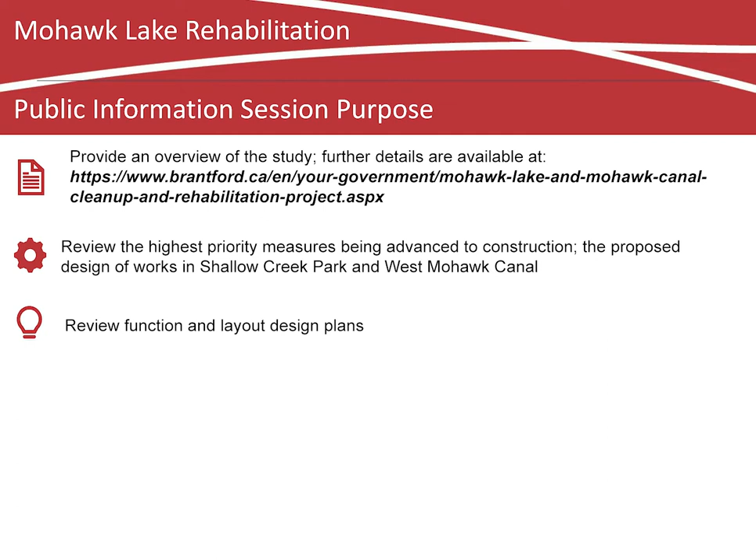This presentation will provide an overview of the study, review the highest priority measures being advanced to construction, and the proposed design of works in Shallow Creek Park and West Mohawk Canal. It will review design, landscaping, and restoration plans, outline the next steps in the design and construction process, and identify how we can hear from you.

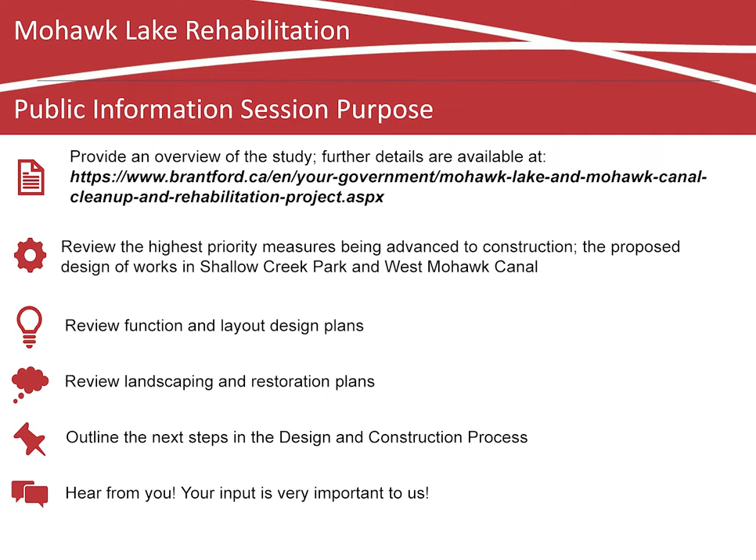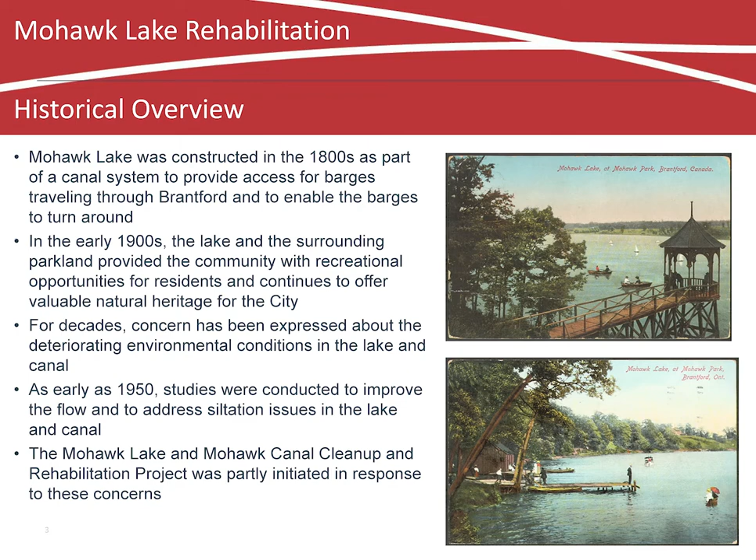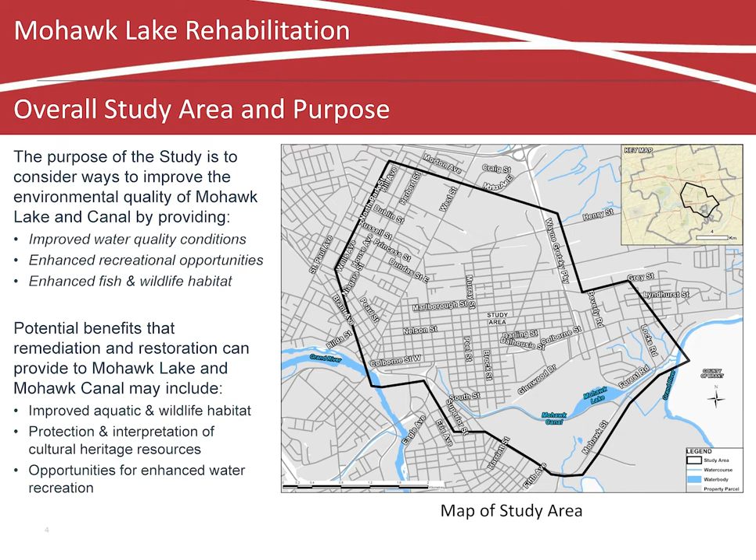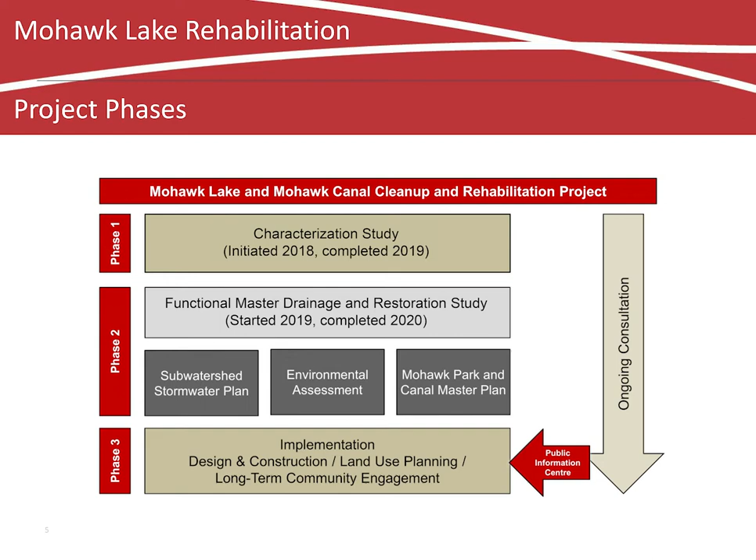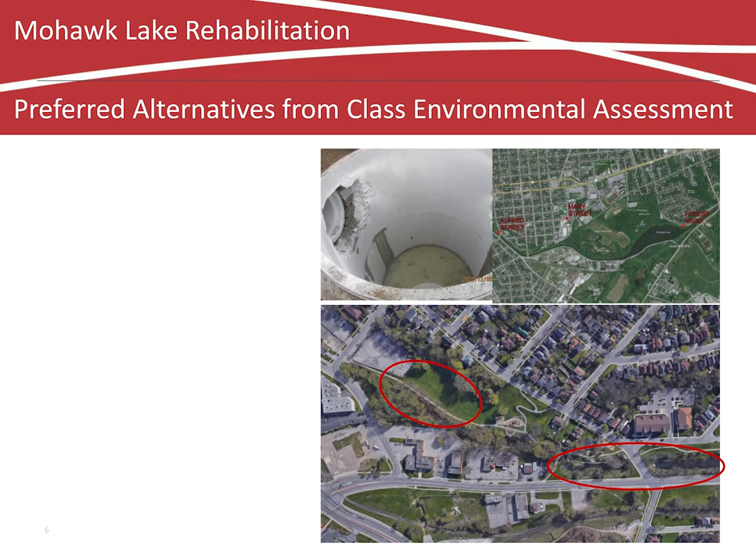The city considered different alternatives to address identified challenges and evaluated these to reach preferred alternatives. One of the preferred alternatives is oil grit separator retrofits. The upper left image is of an oil grit separator, which resembles a circular concrete cylinder with connections for pipes and a deep sump pit to trap sediment. In December 2020, three oil grit separator retrofits were constructed to treat storm sewer contaminants upstream of the lake.

The upper right image is an aerial map showing where these oil grit separator retrofits were constructed, namely Alfred Street, Mary Street, and Forest Road. The image at the bottom, another aerial map, highlights two areas, circled in red, of the retrofits in Shallow Creek Park and West Mohawk Canal. These are additions to pre-existing infrastructure and are currently being designed.

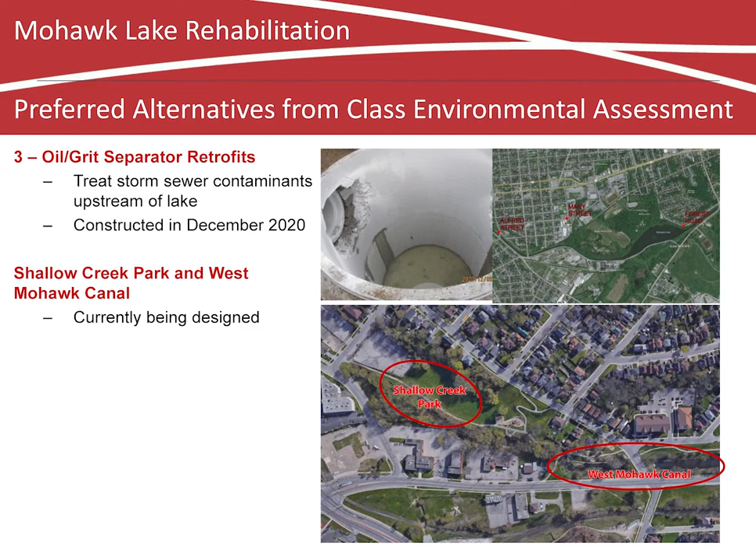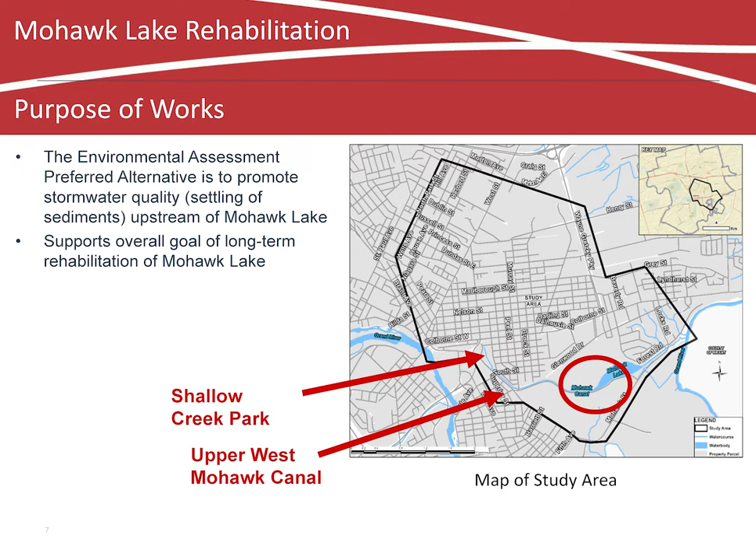Previous work to identify actions supporting the overall goal of long-term rehabilitation of Mohawk Lake resulted in a preferred alternative to promote stormwater quality by settling of sediments upstream of Mohawk Lake. The map shows Mohawk Lake circled in red, with arrows pointing to Shallow Creek Park and Upper West Mohawk Canal.

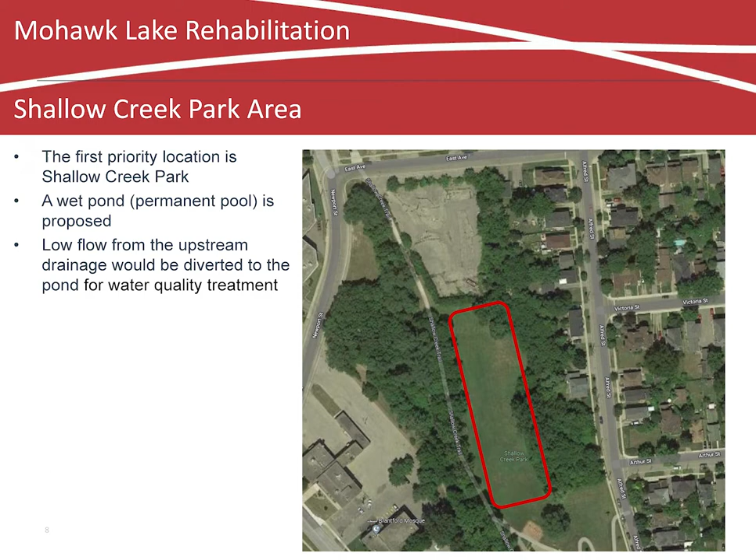Shallow Creek Park is the first priority area. The aerial view of the map shows Shallow Creek Park circled in red. For this area, it is proposed that a wet pond with a permanent pool be constructed. Low flow from the upstream drainage would be diverted to the pond for water quality treatment. Holding water in the pond will allow sediments to settle out of the water prior to flowing into Mohawk Lake.

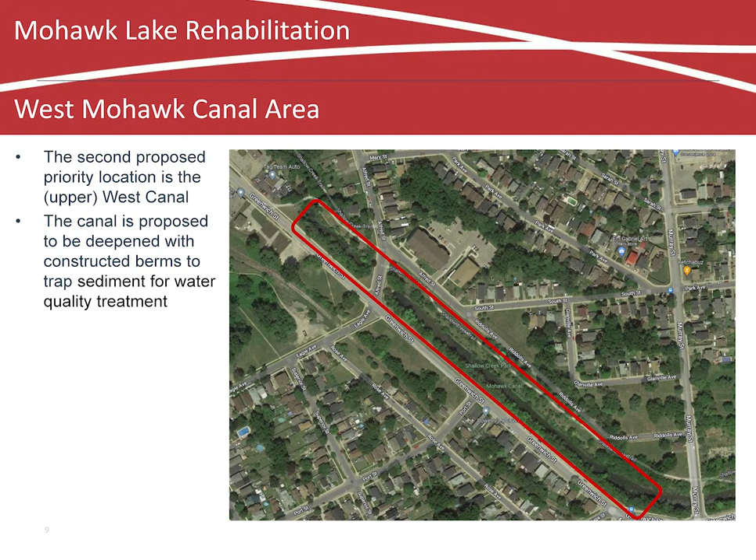West Mohawk Canal is the second priority area. The aerial map shows West Mohawk Canal circled in red. For this area, it is proposed that the canal be deepened with constructed berms to trap sediment for water quality treatment.

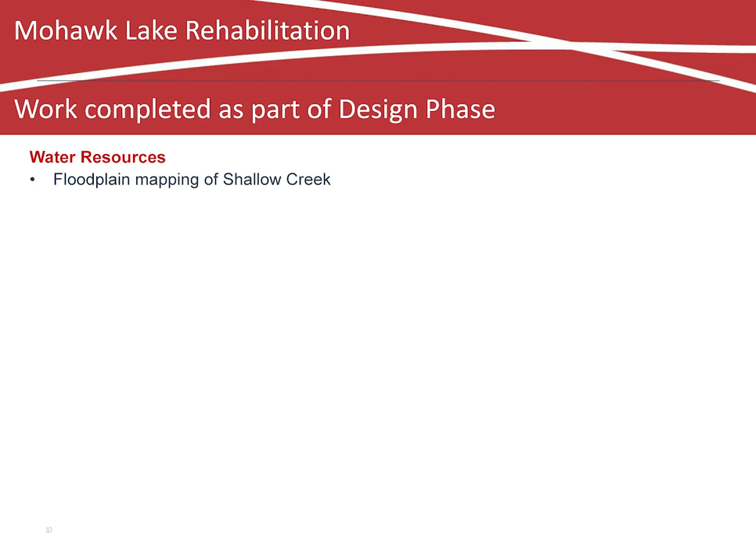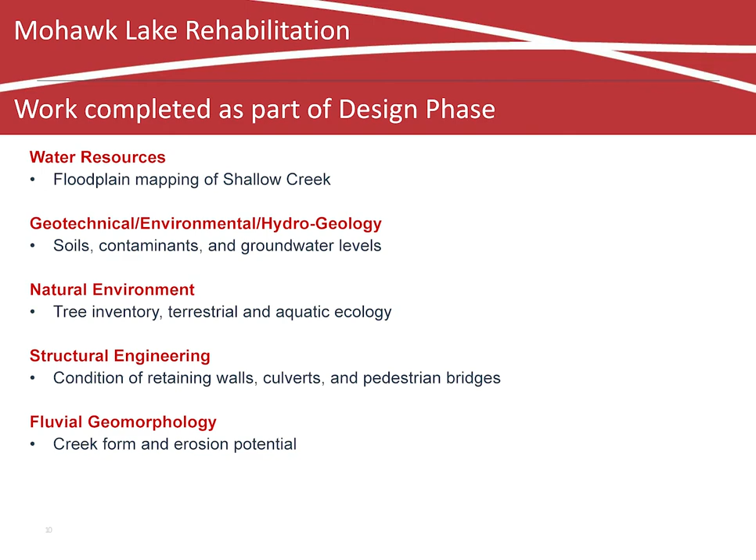To support the work, the city conducted five types of supporting studies as part of the design phase. These studies are the Water Resources Study, which mapped the floodplain of Shallow Creek; the Geotechnical Environmental Hydrogeology Study, which evaluated the soils, contaminants, and groundwater levels; the Natural Environment Study, which included a tree inventory as well as a terrestrial and aquatic ecology assessment; the Structural Engineering Study, which explored the conditions of retaining walls, culverts, and pedestrian bridges; and finally the Fluvial Geomorphology Study, which examined the creek's form and erosion potential.

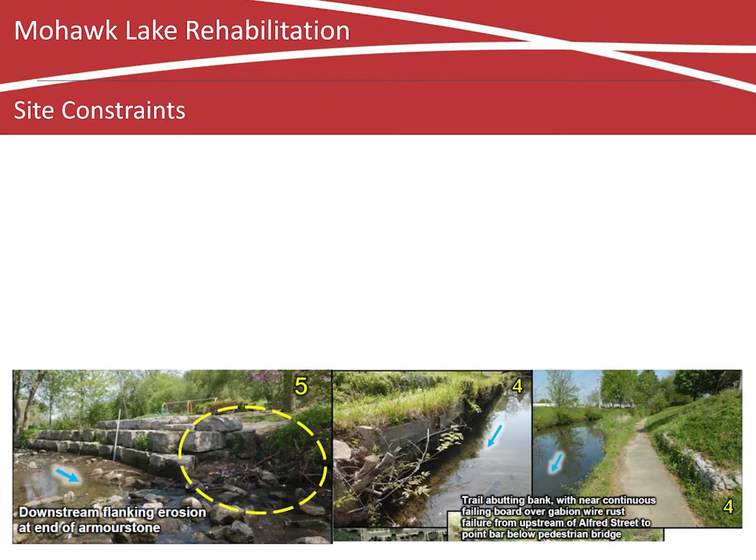There are several site constraints that have to be considered in developing a design. These include legacy soil contamination issues in Shallow Creek Park, the need for an impermeable liner to isolate works from affected soils and avoid groundwater impacts, and the need for erosion control along the creek channel. The photo on the left shows the need for armourstone abutments along the stream bank, and replacement of gabion baskets and wooden boards along West Mohawk Canal and the adjacent towpath trail. The photos on the right show the towpath trail, a historical path for the horses that towed the boats and barges in the canal.

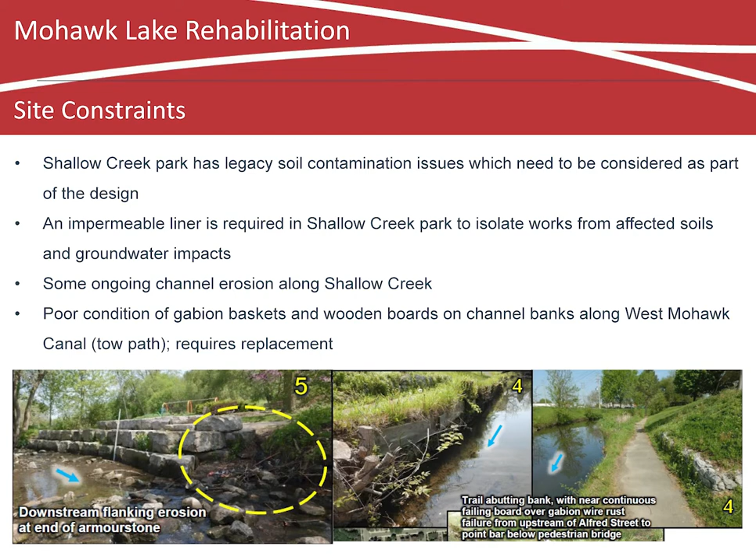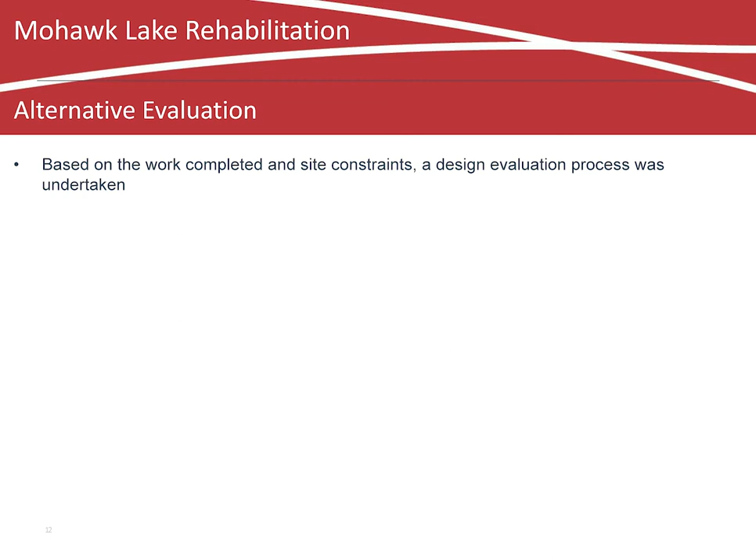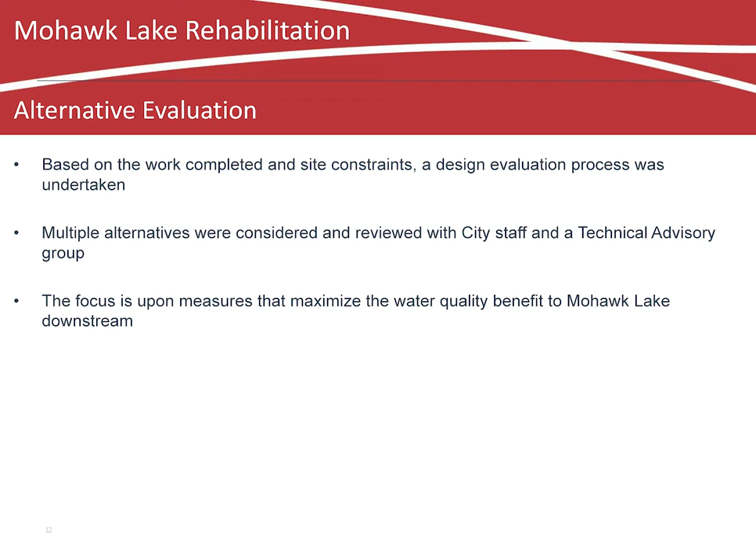As mentioned earlier, the city considered several alternatives. The design for these alternatives were evaluated in collaboration with a technical advisory group, considering work completed and site constraints. The evaluation focused on advancing measures that maximize water quality benefit to Mohawk Lake downstream. Preferred design alternatives were selected based on this assessment, balanced against local impacts such as social and environmental impacts, and other factors including cost. The next few slides present the preferred alternatives.

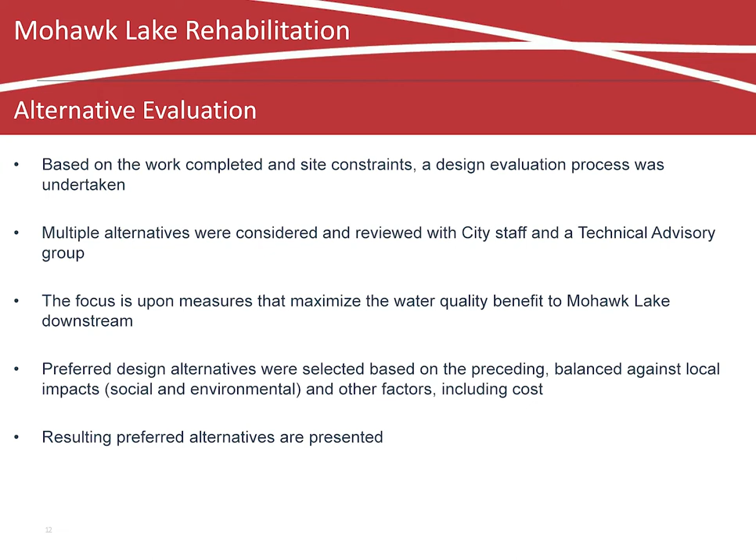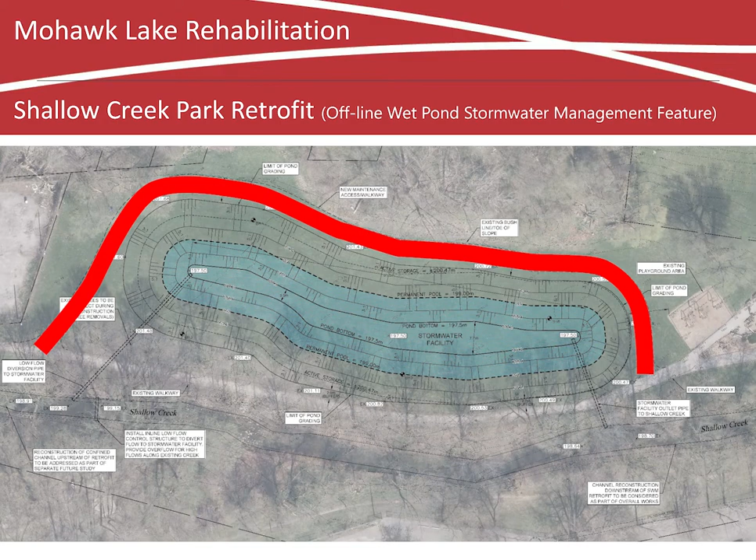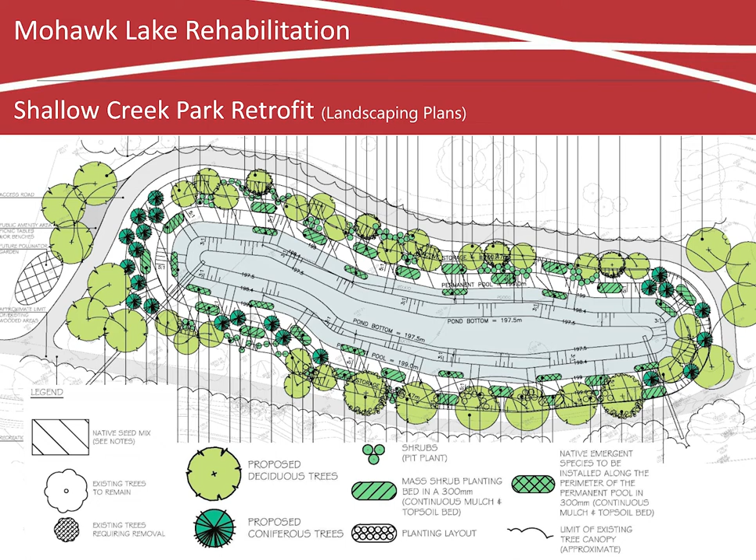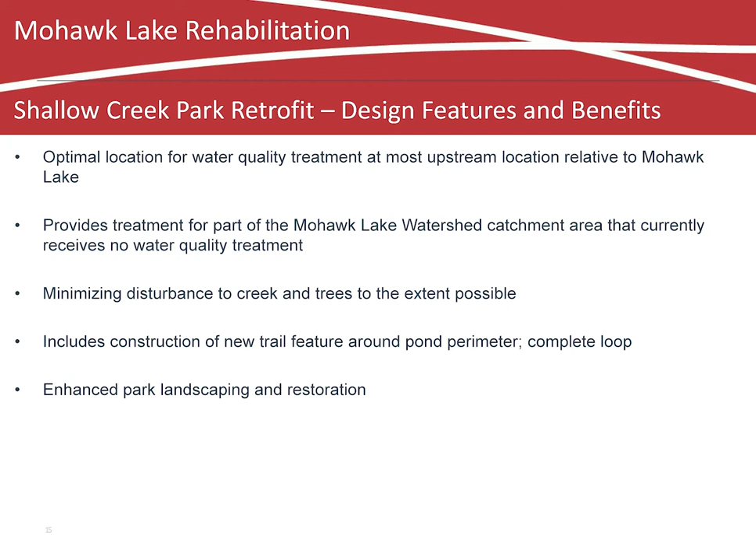There are several benefits of the Shallow Creek Park retrofit. It is located in an optimal location for water quality treatment at the most upstream location relative to Mohawk Lake. It provides treatment for part of the Mohawk Lake watershed catchment area that currently receives no water quality treatment. It minimizes disturbance to the creek and trees to the extent possible. It includes construction of a new trail feature around the pond perimeter, making a complete loop, enhanced park landscaping and restoration, and ensures consideration and safety for the adjacent playground area.

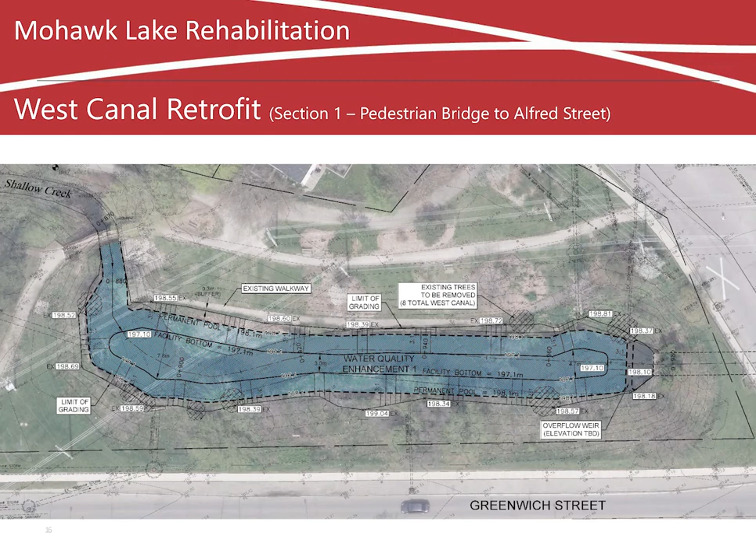The next preferred alternative is the West Canal retrofit between the pedestrian bridge and Alfred Street. The figure presents a drawing of the planned retrofit along Greenwich Street. The existing canal will be deepened with a constructed berm to trap sediments. The existing towpath will be reconstructed. The construction will require the removal of 8 trees.

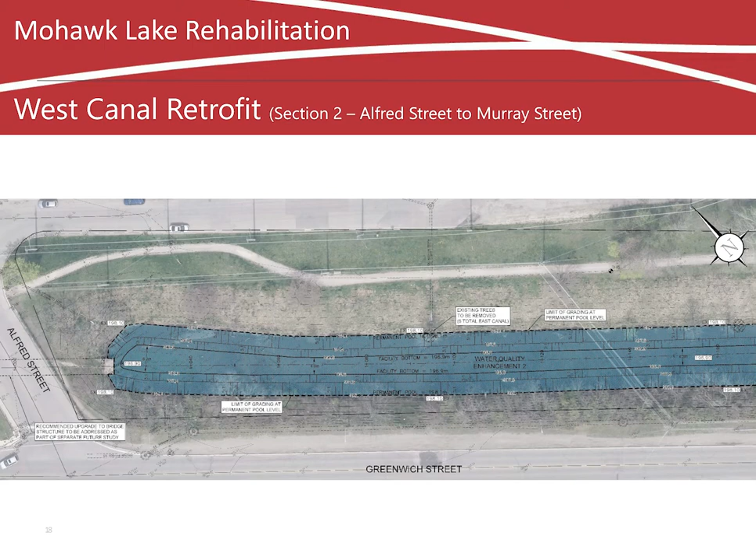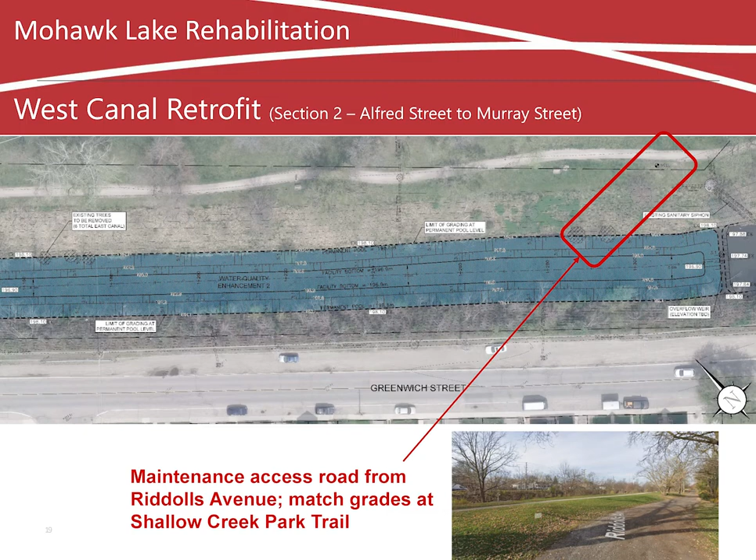Moving east along the West Canal retrofit, this figure presents the area near Murray Street. Work in this area involves deepening the canal with constructed berms to trap sediment. This figure identifies the location of the proposed maintenance access road from Riddolls Avenue, which will match the grades at Shallow Creek Park Trail.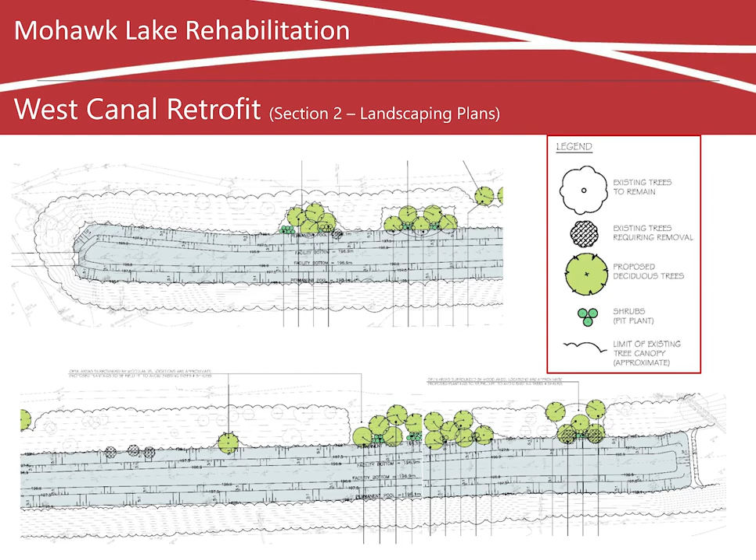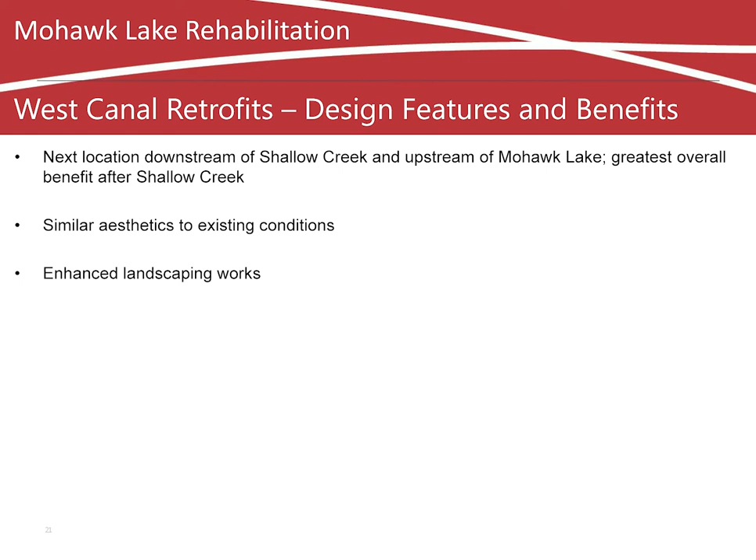There are several benefits to the West Canal retrofit. This is the next location downstream of Shallow Creek and upstream of Mohawk Lake, offering the greatest overall benefit after Shallow Creek. It proposes similar aesthetics to existing conditions with enhanced landscaping, and includes a recommendation for restoration of the towpath, part of the cultural heritage system. It provides the city with maintenance access via Greenwich Street for future cleanout to minimize disturbances, and also provides maintenance access via Riddolls Avenue for future cleanout and to maintain the existing trail crossing.

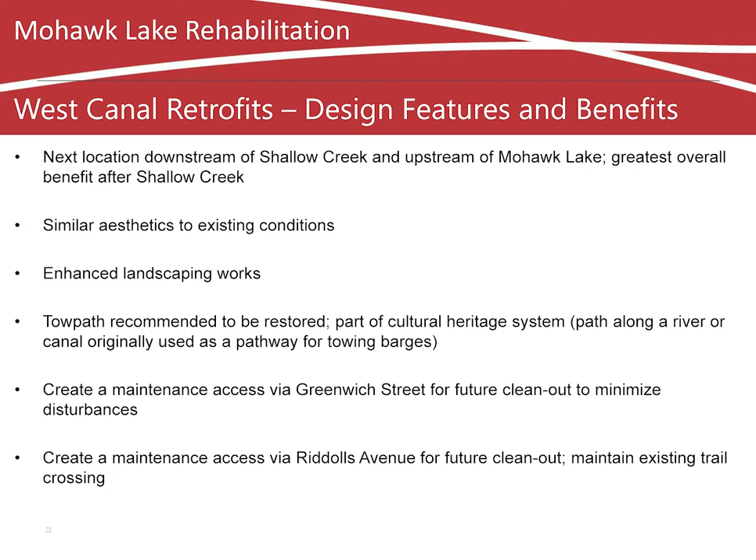This virtual presentation is an important step in the city's process. Hearing from you to finalize the design is important. The city is seeking feedback within 2 weeks of posting the presentation, and on the next slide we will share how to provide this feedback.

After receiving feedback and updating the design, the city plans to submit the final design and permitting for approvals in the 3rd quarter of 2022. The budget review and confirmation of preferred project to advance to construction is anticipated for the 3rd quarter of 2022. If approvals are received as anticipated, the city expects to issue the project for construction tender such that construction startup can occur in the 4th quarter of 2022 or the 1st quarter of 2023. The timing of startup may be affected by permitting restrictions on creek works.